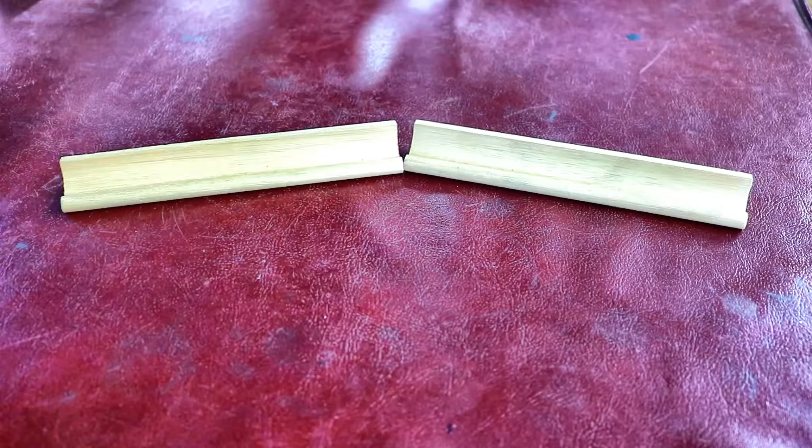This is where we left off on our Fusion engine with the cylinder, of course, operating and the piston operating. Now we're ready for the crankshaft assembly, and we're going to make that as a sub-assembly like we did the piston. Just so we have a little more practice at sub-assembly type thing that is not in the same drawing or the same model. So we'll create a new drawing or a new model.

Click New Design at the top. Let's save it right off the bat. Crankshaft sub-assembly. How's that sound? And then we'll create some components after my computer catches up. There we go. Then we right click on there and say new component.

First component will be the crankshaft. And we're going to create all the components at once here, I mean, at least their headers all at once. Crankshaft, then we'll do the flywheel. Then we'll have the crank web. And one more, we'll have the crank pin. We'll make crankshaft our active component. And of course, S for sketch, create sketch.

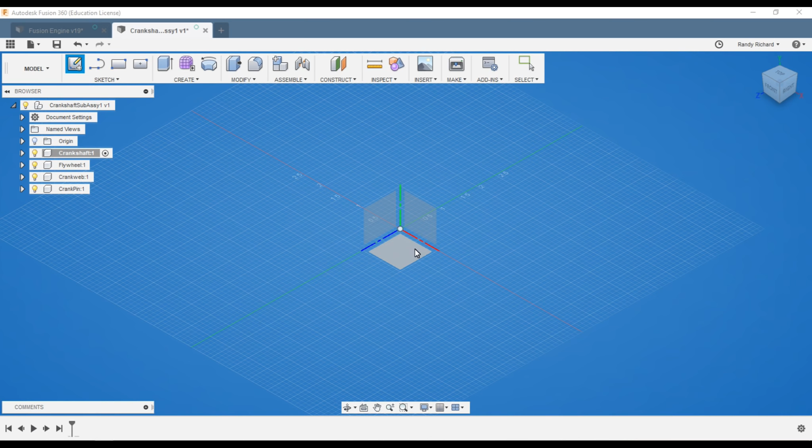Okay. Now this sketch I'm not going to do a profile on. It's very simple. It's just a 1/4 inch rod with a flat and a straight knurl on one end. And so I want the Z axis here to be my axis down the center of the crankshaft. So I'm going to click on the XY plane. C for circle, right in the middle, 0.25. Stop sketch. Q for press pull, and it's 2.5 inches long. That's our crankshaft.

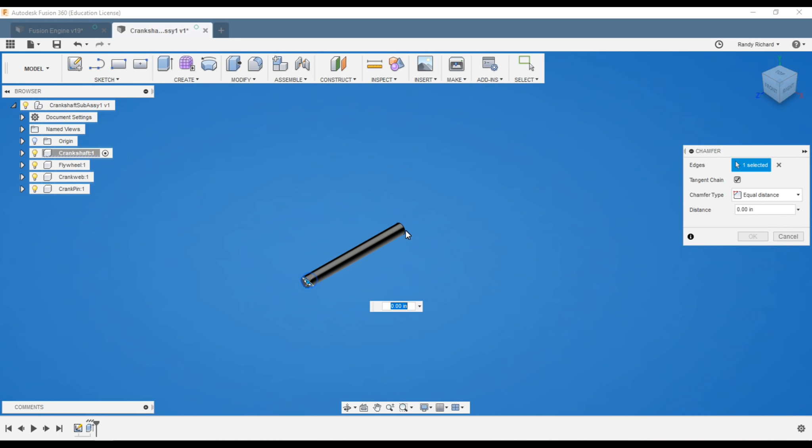Now we need a flat on this far end, and we want to show a chamfer on here. So we're going to chamfer it first. And this is going to give you a little bit more insight into project by doing this first. 20 thousandths. Yeah, that's a nice little chamfer, see? So both ends are chamfered. We'll go to the far end down here on the right. We'll just create sketch, and we'll select the very end.

Now, I just want to create a flat that's cut away from the top of the shaft for a 1/2 inch deep. And if I do a line and just draw it across here, my plane is the small diameter, not the large diameter. So I can see how it snaps to the diameter of the small part of it, which is kind of nice, and I could just snap there and draw a line across, right? I'm going to delete that. But really what I want is a line across the large diameter. But if I do line, I can't snap to it because it's not on the same plane.

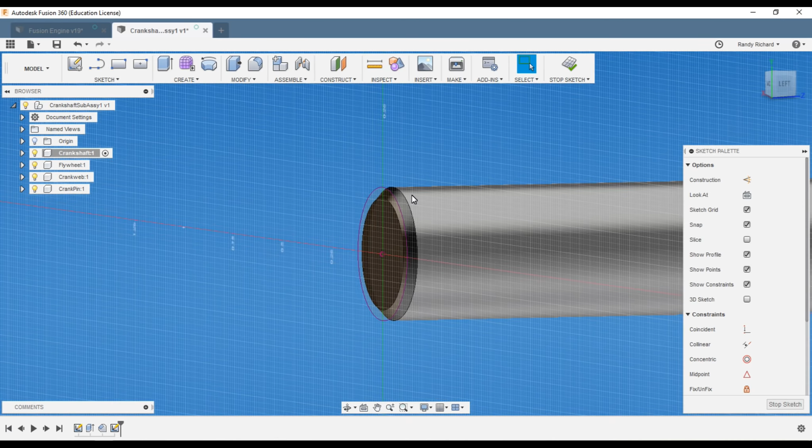So this is where project comes in handy. If you do P for project, select that outer diameter and say okay. Now I'm going to turn the work, and you'll see what it did. It projected that circle showing the outer diameter onto the plane that we're working on right there. See that circle? And basically that's what project is. Project is projecting something to the plane you want to work on. It projects the profile of something onto that workspace so you can use it.

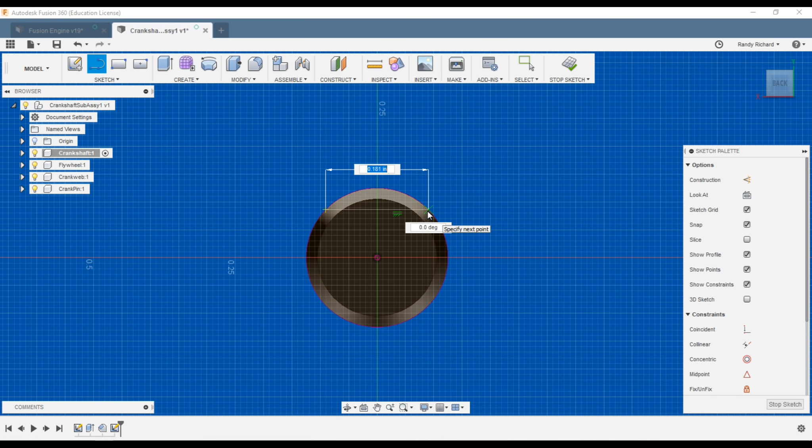Now when I do line, I can snap to it. See how it snaps to it now? And I can just go straight across and snap to the other side and say escape. And I'll set a dimension from the center up here, 0.1. Gives us plenty of room for a flat. And now it turned green, and with the blue background, green means it's constrained.

We'll do a line up, over, and then down. There. And we'll put a distance on that so we can fully constrain it. We don't care what it is. And now we have a nice little box that we'll use for cutting. Stop sketch.

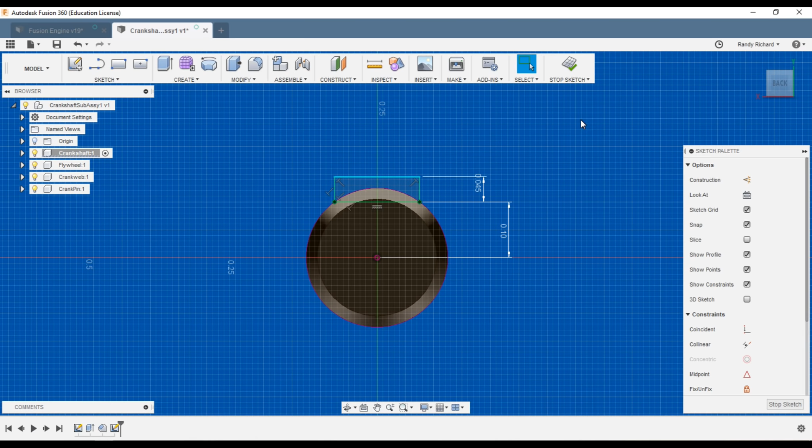And we'll press pull that again, and we'll select all three of those little bits, and we'll just go down here at 0.5. Oops. Edit feature, minus 0.5. Oops. What else did I do wrong? I had join and not cut. There. Gotta make sure I click all the boxes. And now we have a nice cutaway where the flat goes. I just wanted to do it that way to show you the project feature.

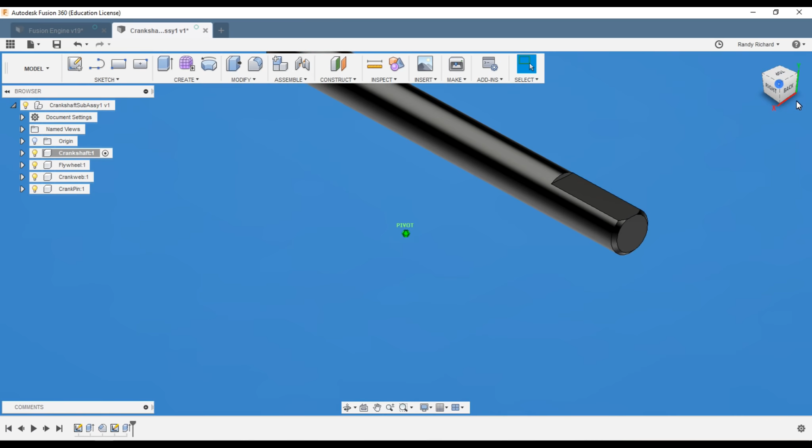The other end has a straight knurl. Now, knurling is not a feature within Fusion. If you want it to be an actual feature where you might machine it with CAM, you'll have to actually model it. If you want it just for looks, it uses up a lot of calculation and a lot of resources for your computer. But this is a very small piece and small knurl, and it's within this one model. So I'm going to draw a straight knurl for you, and it won't eat up too much resources on us.

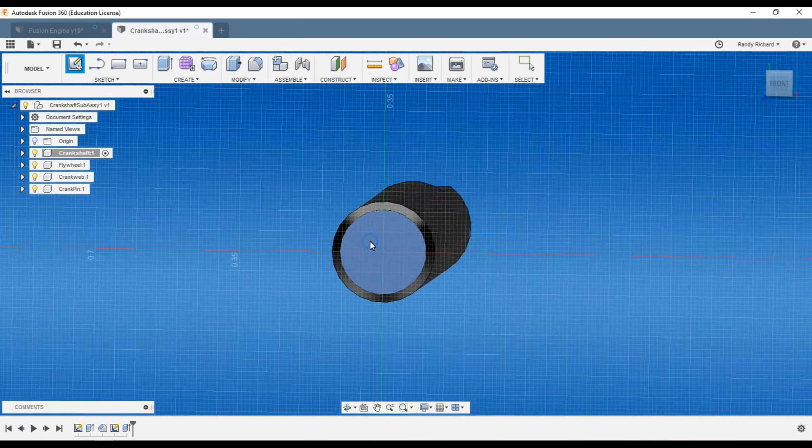And it won't take very long to do. So we'll do sketch again, create sketch. We'll use the end of this plane. And we'll do the project again. Project. We're going to project that outer diameter. Say OK.

And we're going to zoom right in here. We're going to sketch the form with a polygon of our knurl. Now a knurl is just going to be a V groove in all essence, right? So you kind of snap on that line if you want. Polygon, make it 3, and then we're going to make this point 0, 0.

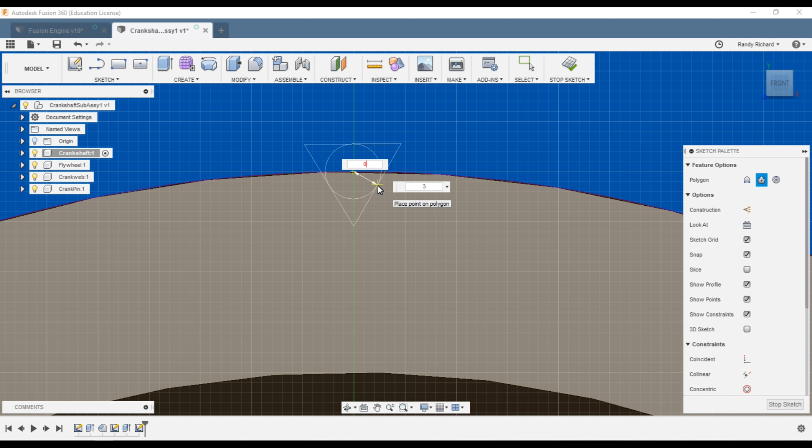Let's make it 4. So 2 thousandths, I should say. 0.002. See, and that's a radius of the inscribed circle. So this is about four. Well, it should be about 4 thousandths across. Since this is just for an aesthetics thing, reminding you need to knurl this, that'll be fine.

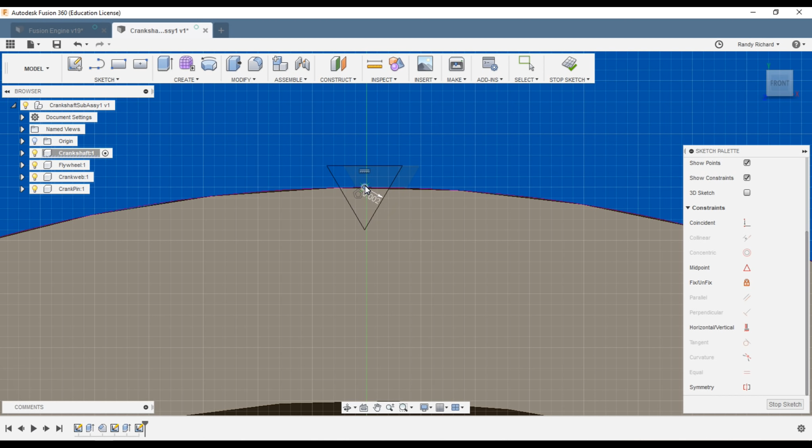And then we'll take the horizontal vertical constraint and click on that. And what it did is made that horizontal vertical, moved it. But if we grab this now, it will stay locked on the outer diameter. And we should be able to drag that over and roughly snap it in right there. It's fine.

We'll use the coincident. It's already constrained. Let's see what else. To get that to be constrained fully, probably have to put a line in. Make it a construction line, and say that is coincident with that, and that will fully constrain our drawing.

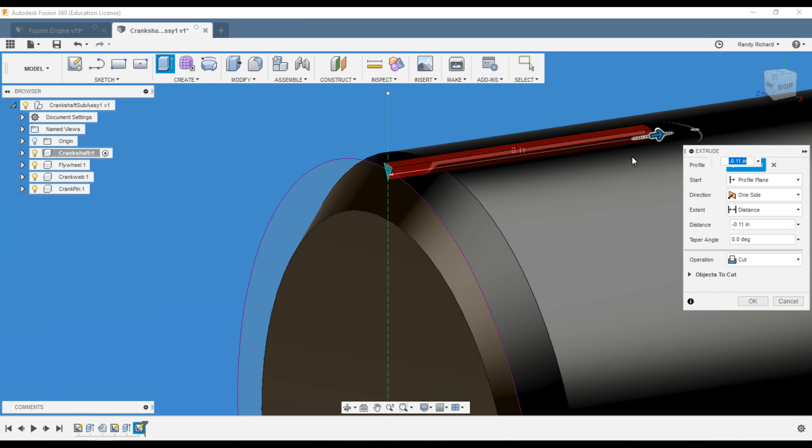Stop sketch. We'll do a press pull. Select little triangle, and it goes in for 0.11, minus 0.11, minus 0.11. Okay, it's a cut, and you have this little V groove. Okay.

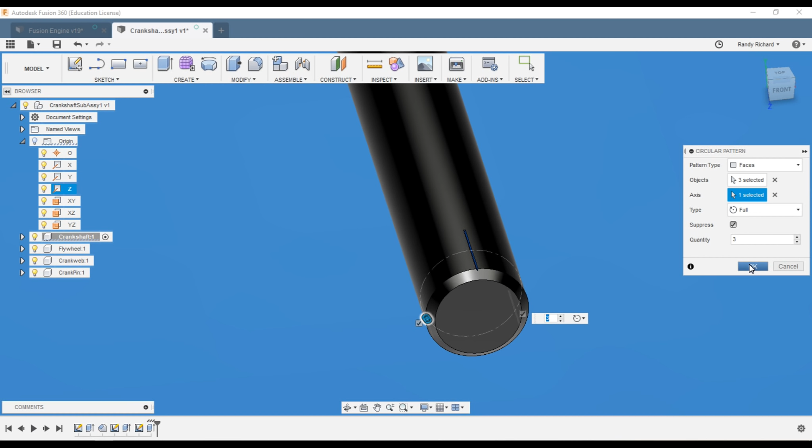Now we'll do under create, we'll do a pattern, a circular pattern. We're going to select faces, and we're going to select all three of these little faces in here. Okay. Axis, we know is the Z axis, so we can go over here and just say Z and say 3. No, try 100. See how long it took to calculate that? Now you can zoom right in here. You can see how it has a little bit of a flat on it.

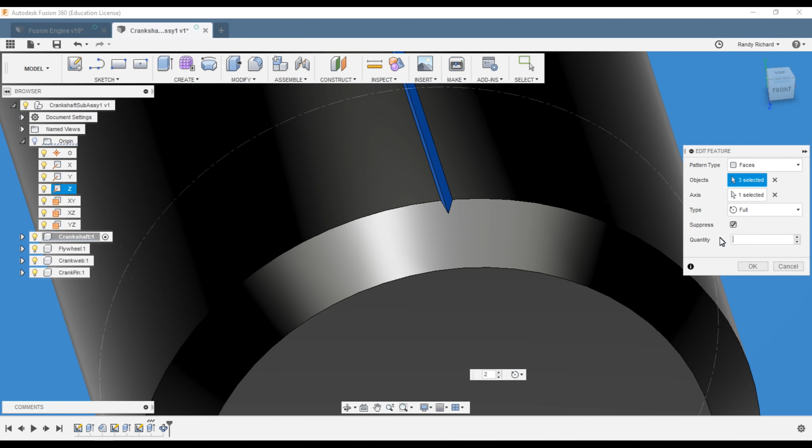Now if you wanted to edit that feature, you can go down and click on it in your history line and say edit. And let's make it 120. It all matters how much of what kind of form you want, if you want it to be real sharp or a little bit flat. I'll leave it a little bit flat, but that's how you could edit it. Now we have a nice little straight knurl.

Now making a diamond point knurl is very similar, but it's a little bit more complicated, and you're going to use a coil and all that. I'd have to make a separate video to show you how to model that.

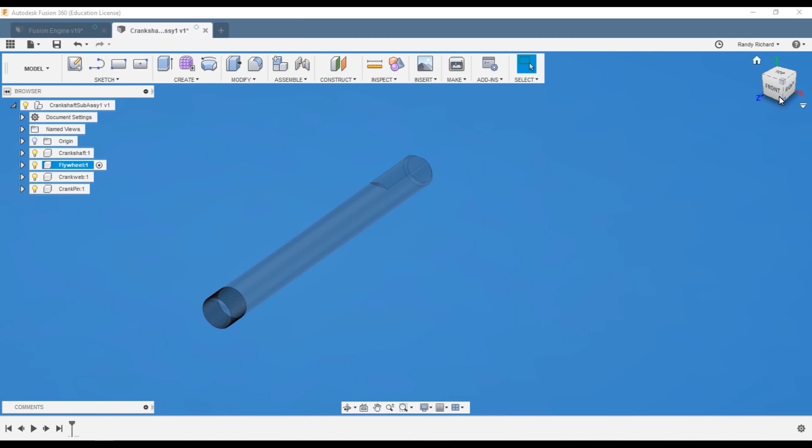All right, crankshaft's done. Let's go to Flywheel, make it active component, and we're going to do the profile method of making the flywheel, and it will take us I think 3 sketches to make the flywheel. And I did draw this in a couple other methods, and I still end up with the fastest method is 3 sketches, no matter what I did. So the profile is probably really the easiest.

So we'll do sketch, create sketch, and we'll sketch it on the Z-axis. So we select that plane. And we'll draw a center line for our length, and that's 1 inch. So we have a referencing line, and let's see here. The hub is offset mostly to the end here, so it's 0.7 divided by 2.

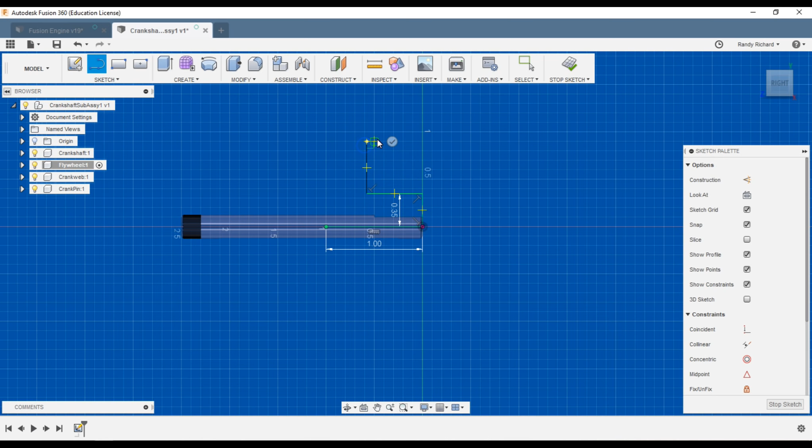Line. It comes in. Now we're just going to sketch kind of roughly what the flywheel looks like. There, goes up, it comes over, it goes up, goes over to here, and down, in, down, over, and down. So there's our rough shape of the flywheel, and there's a bore, and so we have a line in here like that.

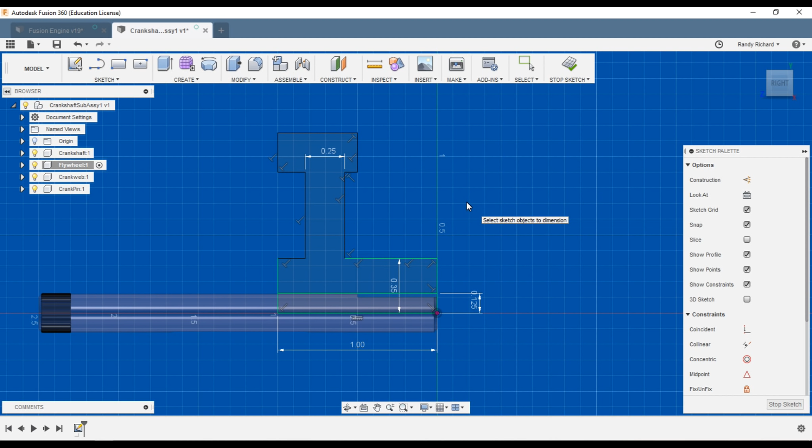Well, our bore diameter is a 1/4 inch. We know that 0.125, then half of that. The web width. Let's make this a 1/4 inch. That's plenty thick enough web. Let's see here. This dimension is 0.625.

And what we want, though, is we want the center of that line to be on the center of this, and this to be collinear with that. So let's use some of our constraints here, collinear, and say this one needs to be collinear with that. And these are all building as constrained parts, so that's good. So that's constrained and that's constrained.

And now we want this to be in the middle of that. So let's put a line at the midpoint. Just do that, make a construction line, and then we're going to say this is symmetrical about that line. Oops. Back up here. Do that again. This one, and then... Always select your 2 lines first and then the one you want it to be symmetrical about.

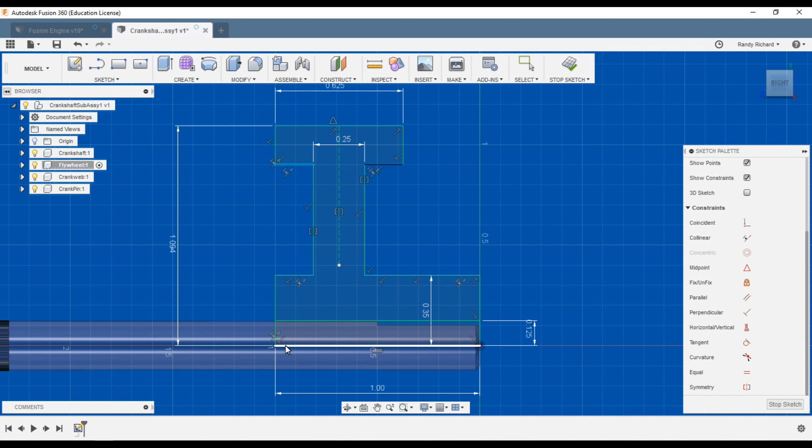Let's see here. These lines we want to be collinear. This one I want to be collinear with that. And we need some dimensions. So the overall outside diameter, oops, it is 2.187 divided by 2. And this here works out pretty nice looking flywheel at 1.5 divided by 2. There you go. And it's fully constrained, it looks like. Yep.

And we could say stop sketch. We'll do a revolve of only that portion. Okay. Select the axis right there. New body, say OK. And we have our flywheel. Now our flywheel has a set screw on the top here. So we'll put that hole in now.

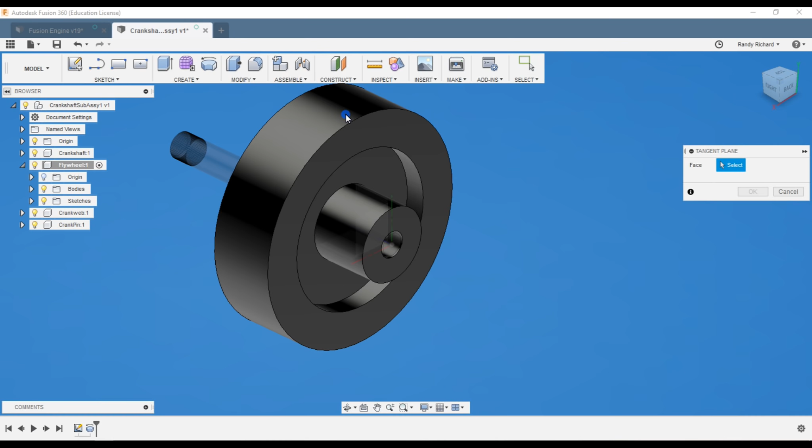And the easiest method I've found is using a tangent plane. And it's going to make it plane tangent to the face. So select the face you want it on. There it is. And see how it's nice and just rolls around the face. Then you want to select a reference plane. And we'll turn on the origin for the flywheel so we can see it real well. And not that one, this one right here.

Now either one of those would have worked, but this one, it will be 0 degrees and it will be on top and parallel with our little flat. Then you go back to sketch and create sketch and select that new plane you drew. Now for this one, we're going to do this a little different. We're going to put a point in. And we're going to do right on the axis, just snap somewhere on the axis, and that looks like a good spot. No particular dimension, just whatever is okay with you.

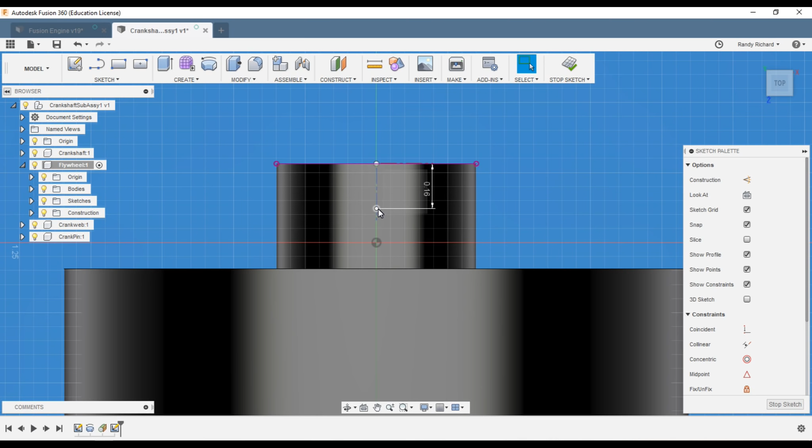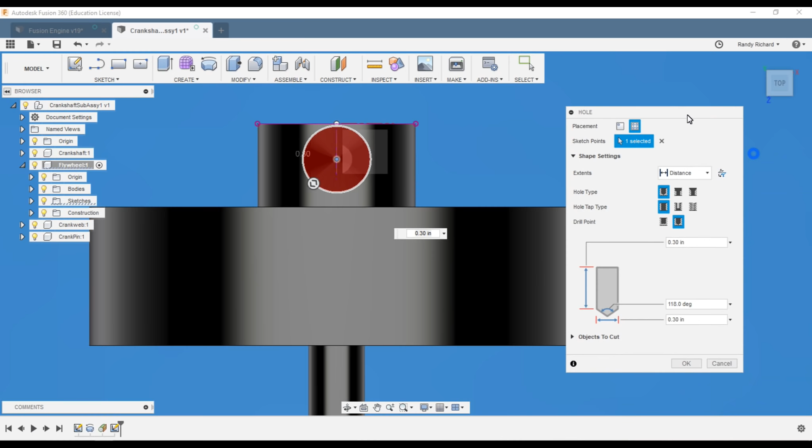So let's say make it 0.160. That looks pretty good. It's about halfway. It's really incidental. We know it's going to be on the shaft, and it should work out. Stop sketch. Now I'm going to do a hole command, and I'm going to select the point. Now that hole's a little on the big side. This is a 10-32, and it's going to be a threaded hole, flat, and we'll go down here. Let's select the number 10-32.

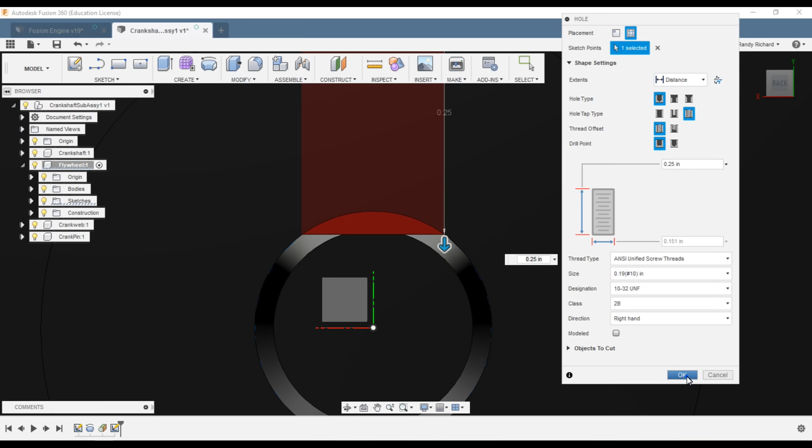So we know, see, we can get a relative size. Now, if you wanted to move it in or out, you could easily do that. And then over here, we don't want to cut too far. We don't want to cut into the shaft. So we're going to look at this, what we're doing. And we can just drag this up there to match where the flat is. Pretty much. And get your box up and say OK. Now you have a threaded hole, 10-32, already in there.

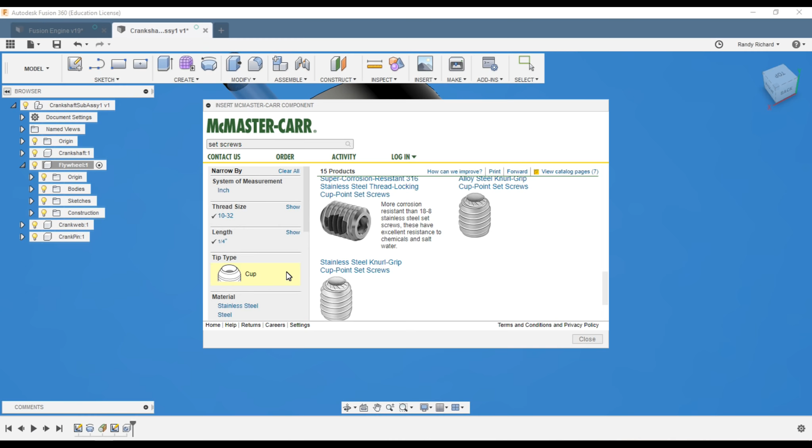And we can put a set screw. We'll do the insert command, insert. Oops, back up here. Set screws, there we go. 10-32. Cup point, fine. 1/4 inch length is what we want. Let's see here. There we go. Product detail. Everybody should know how to do this by now. Step file. Save.

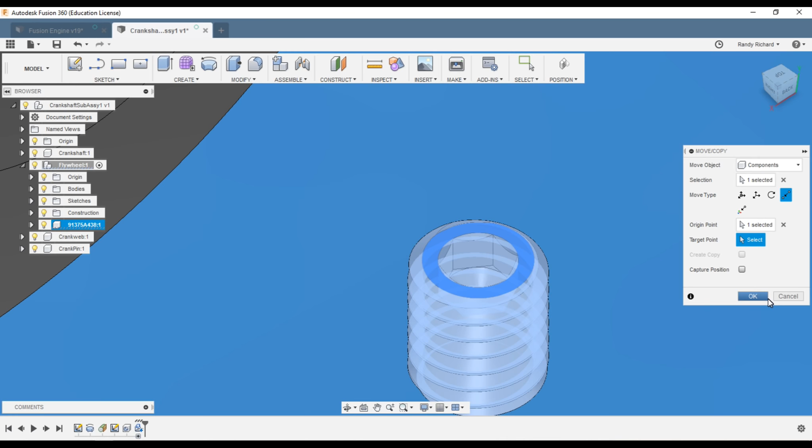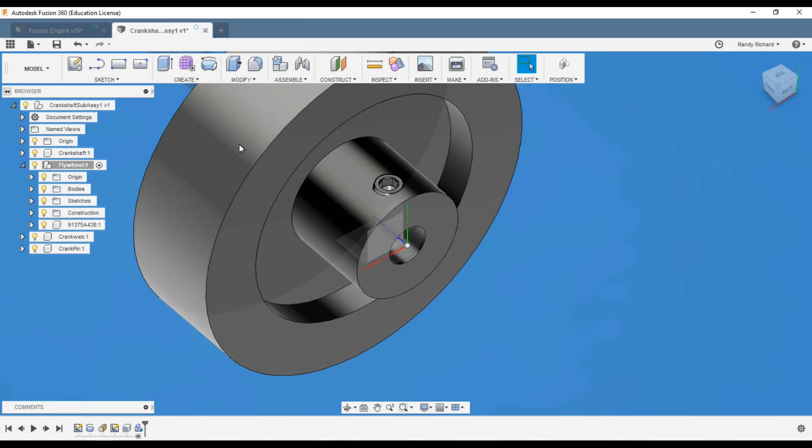I'm just going to orient it a little bit better. There we go. I'll do a point to point, and we'll select something that's going to give us the center. This is a little bit difficult because you're going to get radiuses and stuff. There, hold down control, select the center one right there, target. Now since we did not model that hole, the center is a much easier thing to pick up, and say okay. I'm going to do all my joints at the end and lock everything together at the end.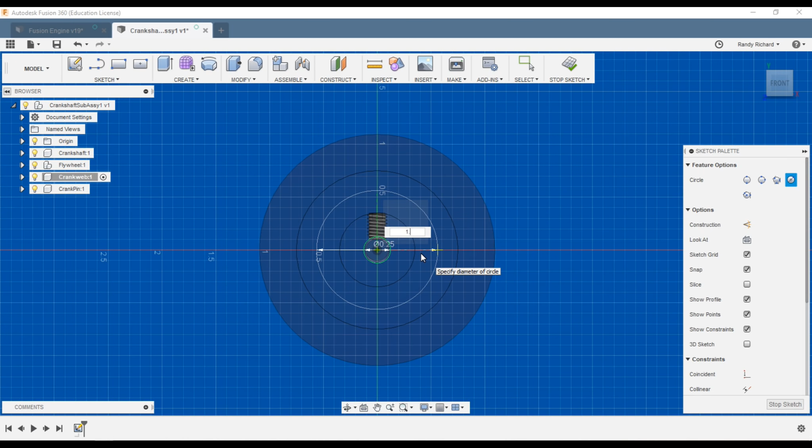Flywheel's done. Let's go to crank web. Crank web sits right here on the end. So we'll just go sketch, create sketch. Select the end here. Capture position on those other ones. C for circle, 1/4 inch, right, for the bore. C for circle, and it's 1.125. 1.375. And there's a C for circle for the crank pin. And we just go down the center line, and that is 0.187.

And we need to dimension that. Now, the dimension here is something to remember because this is 0.562, but that's the dimension that sets the stroke of the piston. So if you felt compelled to change that stroke length, this is the dimension you might want to change. Let's see here. So we're still not constrained, are we? So if you put a construction line in and just say that this is coincident to the line, it will constrain that. That keeps it on center line, right?

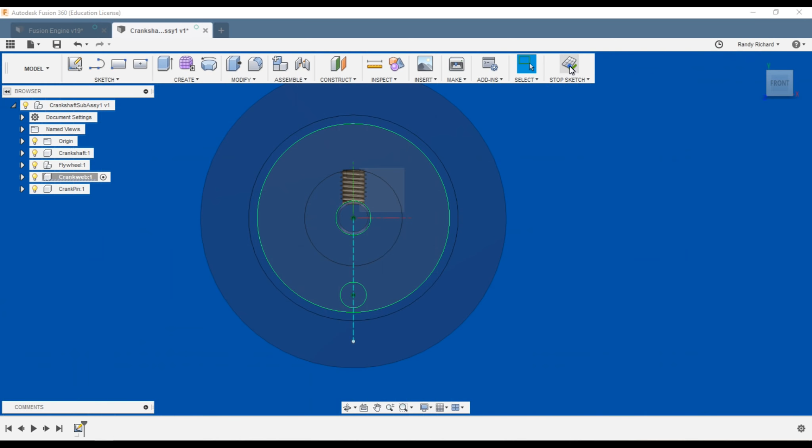Stop sketch, press pull, select just the disc you want. Those others are holes. New body, and it's going to be a minus 0.25. Now what happens here is this is just pressed onto that knurl. There's no set screw in this. We're done with that. Crank pin.

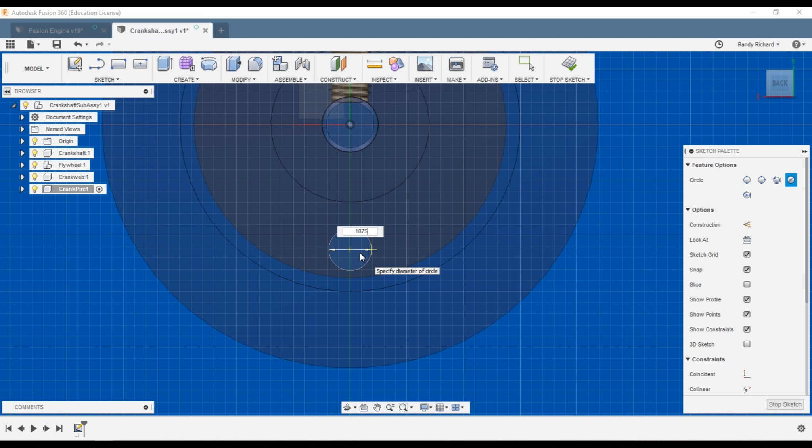I'm going to draw it from over here on the back side. So sketch. I lost my little icon. There we go. Put it back. Create sketch. And select the back side of that. I'm going to say C for circle, 0.1875. It's actually going to be a 3/16 rod. Stop sketch, press pull, select that, and it's 0.75 in length. Whoops. I keep doing that, huh? Edit feature, minus. Okay.

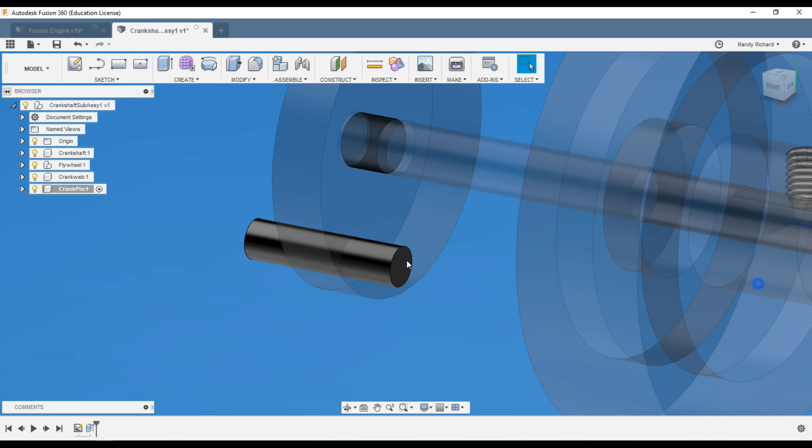Now on this one, this is basically the same as the crankshaft, and you'd want to chamfer each end of this, to make it easier to slip your con rod on and to press it in here. Now this also has a straight knurl on it. We can just hide some of that stuff.

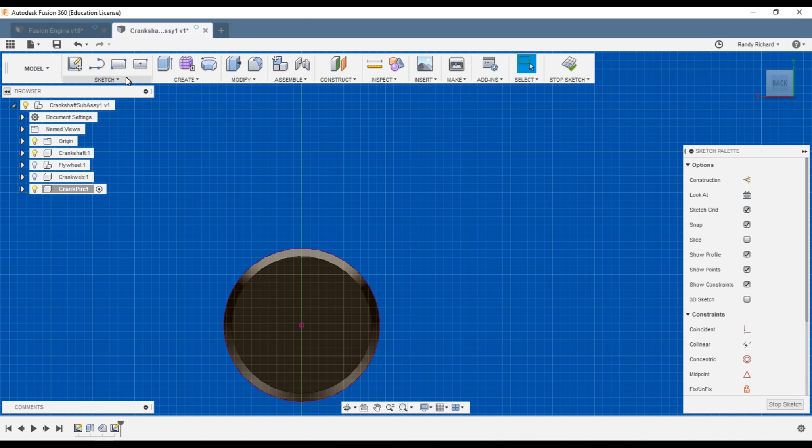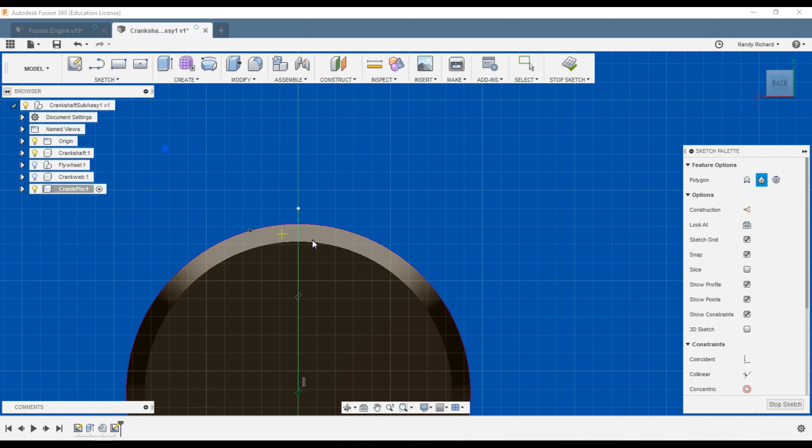Sketch, create sketch on this end. P for project. Select that outer one. Okay. Align. Or no, a polygon. Let's get that right. And we'll just come up here like we did before. Straighten it out. Put a line in. And just drag it over here. I lost it. There. Do this again.

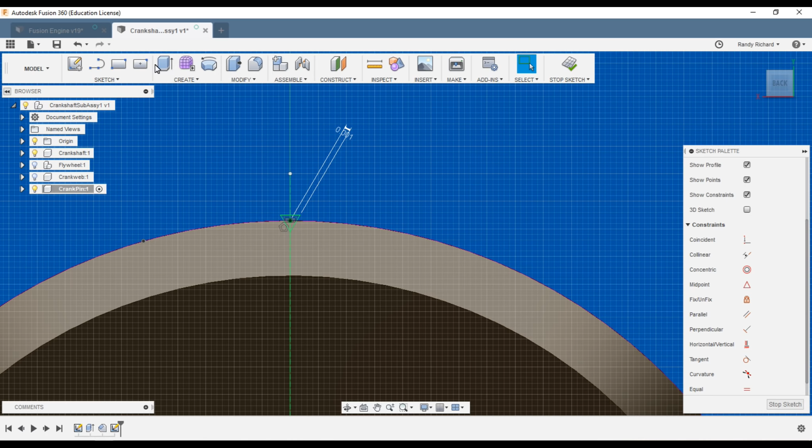That's it. We're going to make this 0.001. I didn't put that in initially. Press pull, same. Cut. Minus 0.2. Okay.

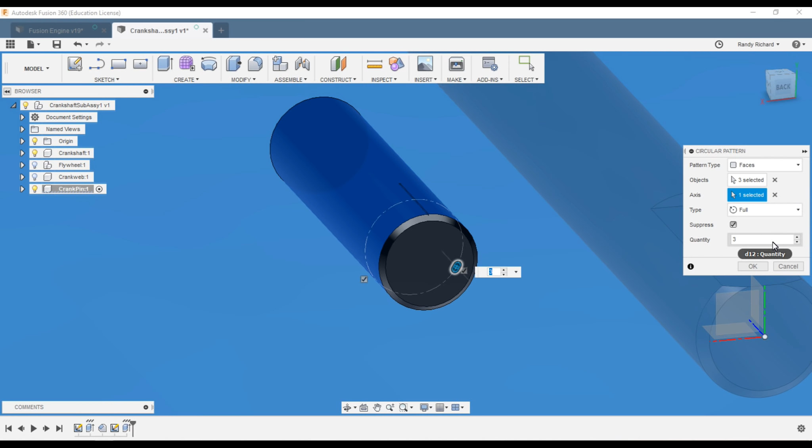Create pattern, circular pattern. Axis. There's no axis, but select the outer surface of the pin and that acts as an axis. I think 120 is probably pretty close, good enough for us here. And that looks pretty good. You can then turn on all your other objects and select the base object, and we have a crankshaft assembly.

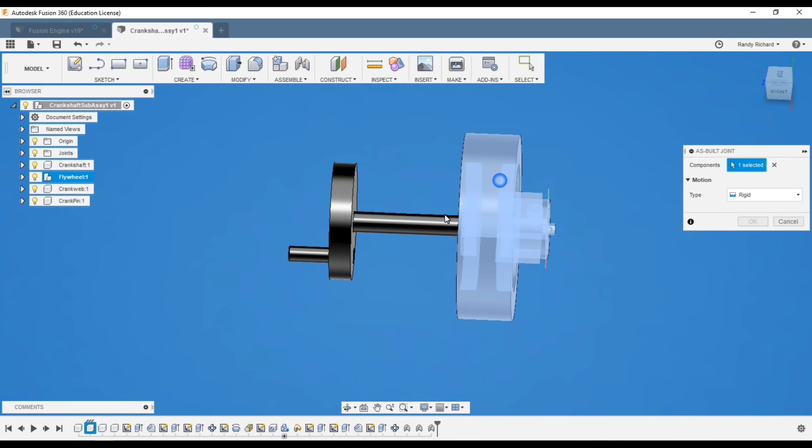And we turn off our origin, we turn off our joints, making sure our origin and joints are all turned off. If you don't turn those off, they will show up when you move this or have it appear with your main model. Those joints will be there, and then you have to come back and turn them off. So do all this ahead of time before you bring it over to your model.

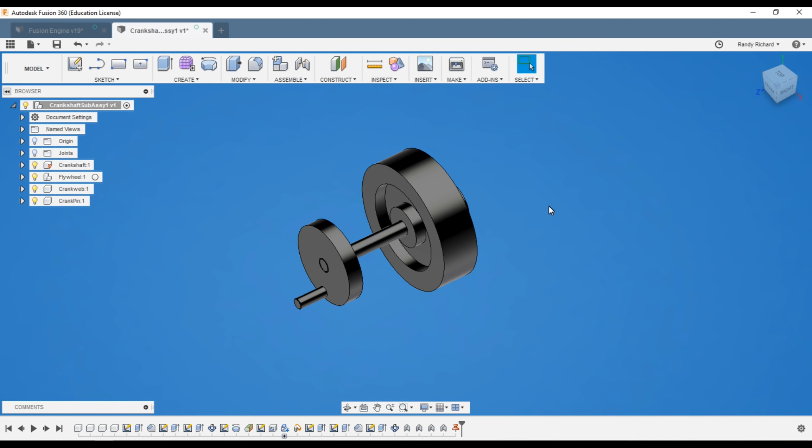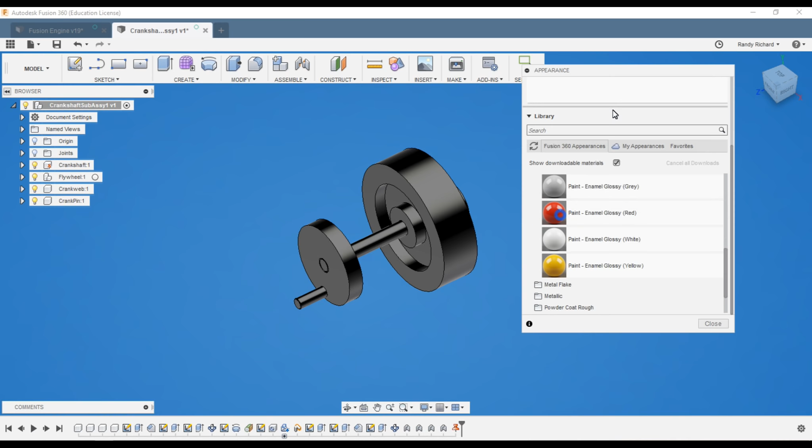So if you're going to do any appearance stuff, we could say A for appearance. Where was it? We did our paint. Glossy paint. We used blue, and we used red. Our color schemes. So let's make the whole flywheel blue, and we'll choose faces, and we'll make that face red, and make that face red. And the other ones are already steel. Those are my default.

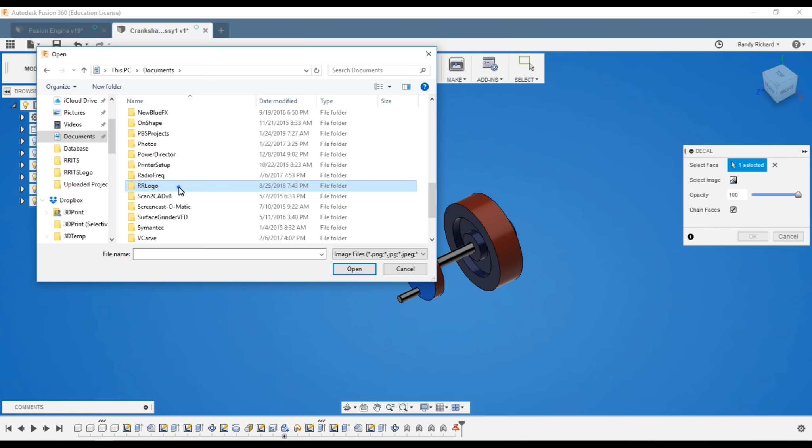And we'll put our decal on this face right there. I just have to, there we go. Turn over here and give it a little better positioning. Yeah, somewhere in there. If you zoom in, you'll have a little finer detail in that movement. Say okay.

All right. Now we didn't do any saves along the way, so we're just going to save, and we'll just say final on that. And we're good. And we'll give that a few seconds here to save. Now I have a bunch of versions going because I've drawn this several times. Well, okay, so that's a basic flywheel.

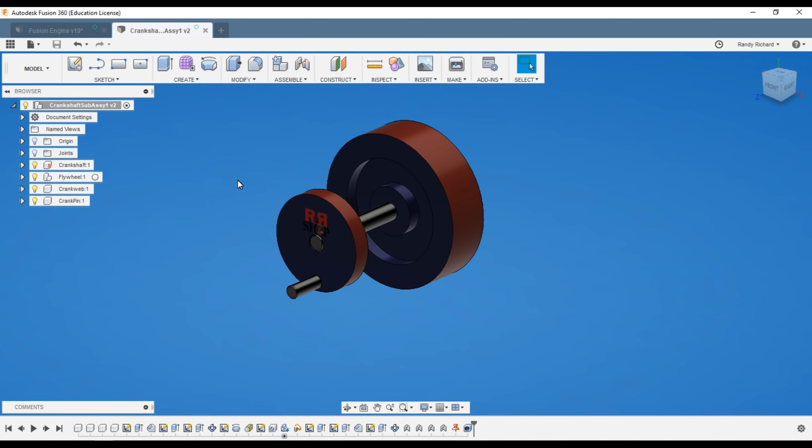One thing we forgot here, we'll go back to flywheel, and we did not put any spokes in the web part of the flywheel. So we can do that. We'll just say sketch, create sketch here. I selected the flywheel as the active object. Select the center. I'm going to put a line up here, construction line. I'm going to do another line, just a vertical line anywhere in here. We'll dimension that line and make it 0.125.

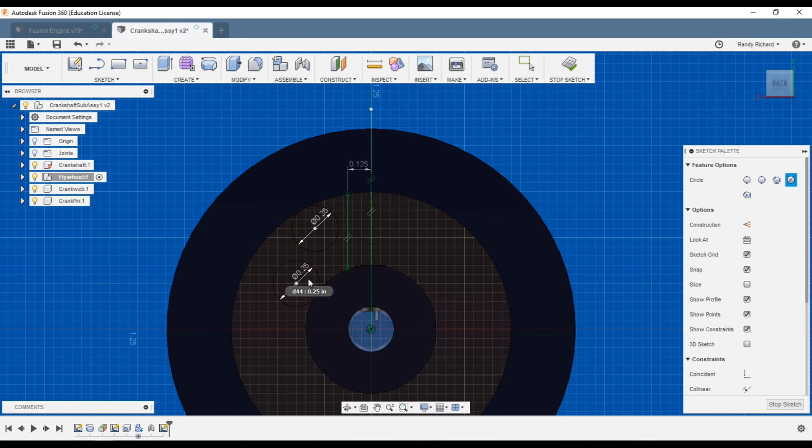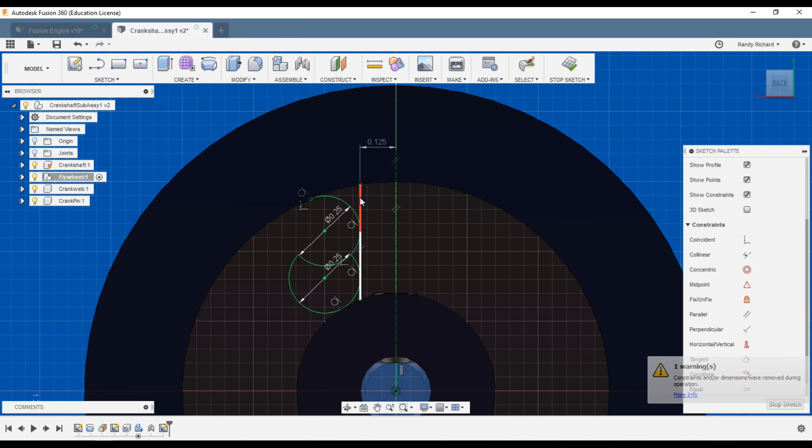C for circle, we're going to put some 1/4 inch radiuses in, 0.25. C for circle, just drawing those anywhere. Then we'll use our constraints, tangent constraint, tangent to this line, that circle, this circle tangent to this circle. This one tangent to the circle, and then tangent to the line. And if you trim off some of this, trim that, trim that, trim that. Now we have a 3-segment line here.

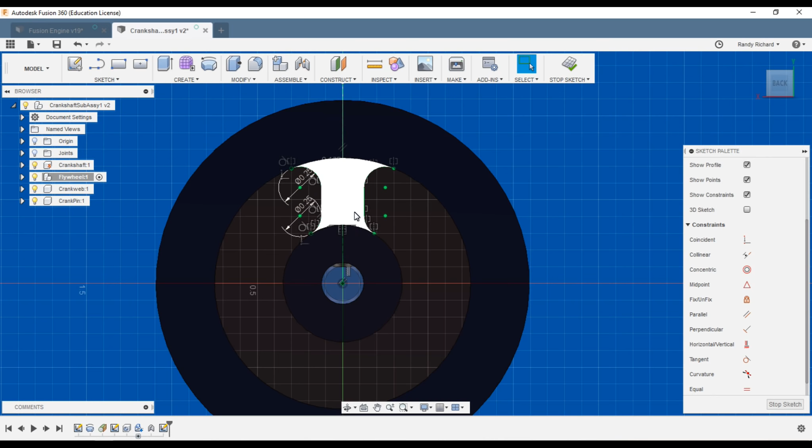Say escape, and we can then sketch mirror those 3 segments, and we'll select our construction line as our mirror line. Now we have the same over here. Okay, that looks pretty good. Now you can do this part 2 ways. You can circular pattern those lines all the way around, or you could make this a cutout, make this a spoke, and then make a circular pattern for the object.

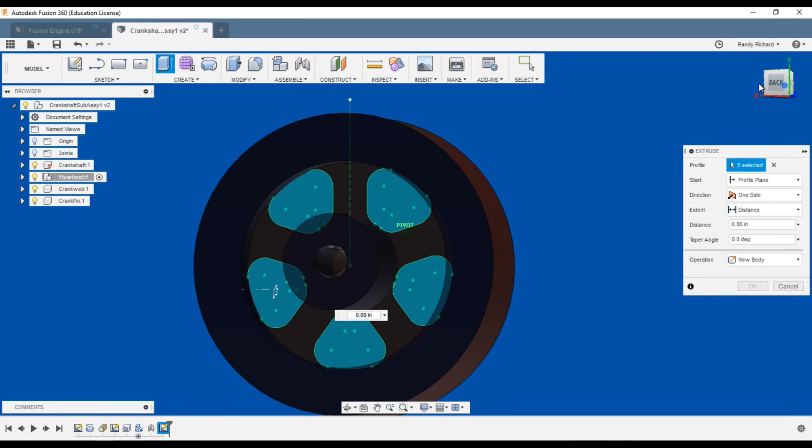So we'll just do the circular pattern right now. Circular pattern, and we're going to select all 6 lines like that. Select the center point there, and we have 3. Let's make it 5. Say OK. So we'll have 5 spokes. And we'll stop sketch. Then we'll do a press pull, select all 5 of those, and come around to this other side. Say cut. OK. Now we cut in our 5 spokes. Now it's done. So when we save it, we could say added spokes.

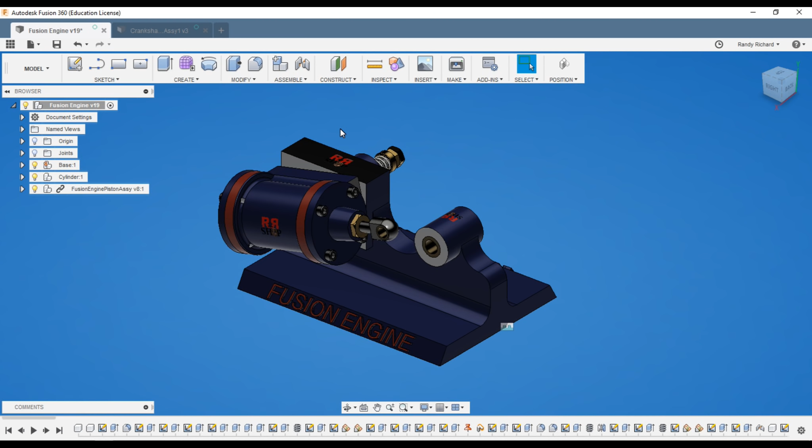And then we saved it. Oh, we should go back to our final assembly, I guess. We'll say save again. Now back over to the Fusion engine itself, our base drawing, and we will find your crankshaft right there. This is mine, and we'll just drag it in.

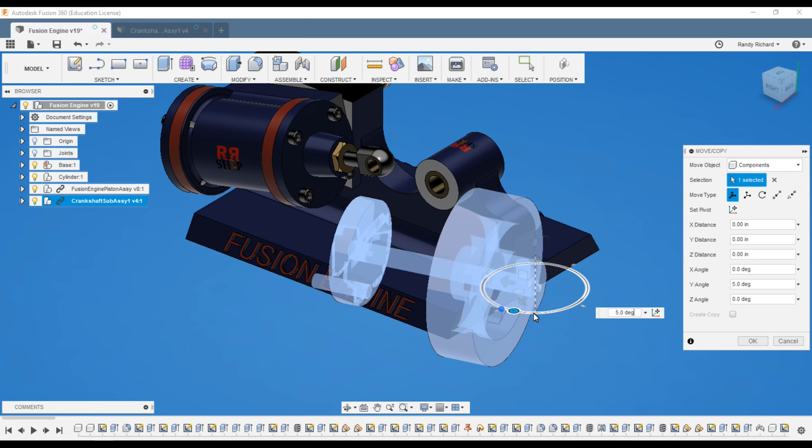And there's the crankshaft. We can rotate it around how it ought to be, probably. It's just a spatial orientation thing. You don't have to do this sort of thing, but we can just to get an idea of what we're doing. There we go. We can do a point to point, and I am going to select.

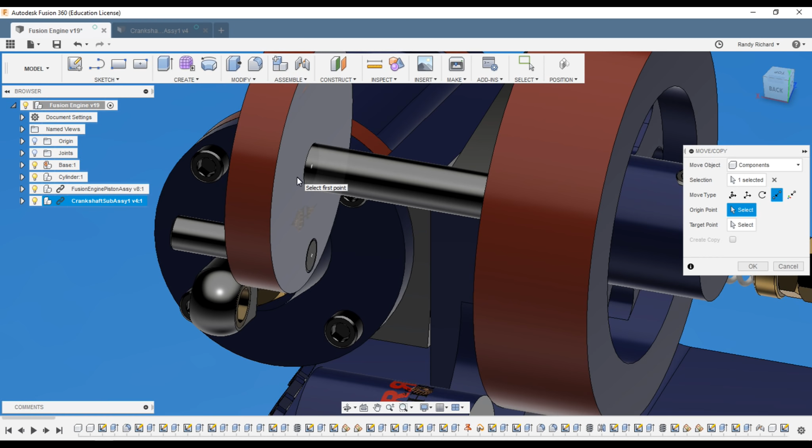Don't select the shaft. All right, your first instinct might be to select that shaft, but if you do, you're going to end up with some point in between here, and it just makes it more difficult. If you select this face of the crank web here, and it gives you the center, hold down Control, make sure you get that point. It gives you some referencing.

And we're going to select the face of the main of the base itself, not the bushing. And we'll say Control, and there you go. Now it's in, and we know that this face is against that face. We can say OK. And now your piston, you can rotate your piston. You can see where the piston rod's going to sit on your crank pin.

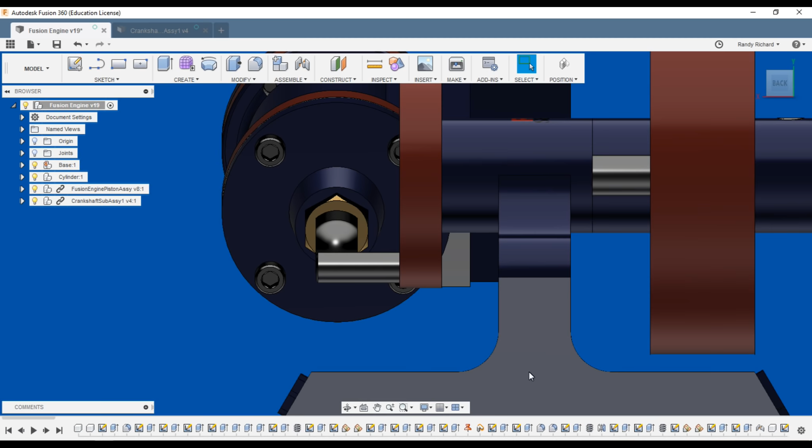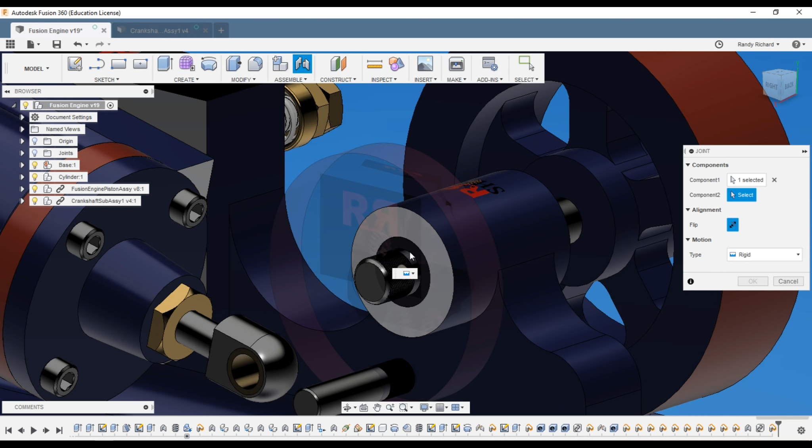Obviously this crankshaft needs to come to the outboard side here a little bit so we can get our piston rod more in the middle of there. So what we'll do is we won't do a move, we'll just create our joint now. Let's say capture position. And we're going to select the same face and select the center again. Then we're going to select this face and select the center again. Of course, that's in the middle, right there, right?

And it's going to be a Revolute joint. There we go, it turns, and we're good. But what we need to do is change our Z offset. Now, if you go back here, you can just grab this arrow and just drag it out, right? And let's see, that's probably close. It's not dragging everything, but we'll say okay and take a look at it and say, oh, that's not too bad. Go back if you want to do it some more.

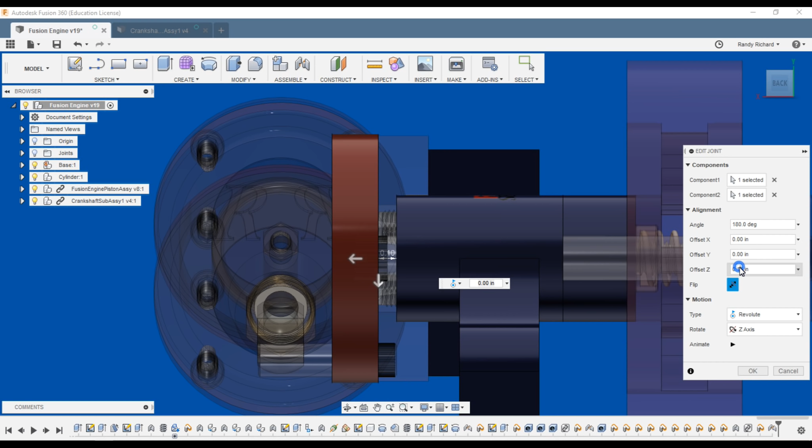Edit joint. That was a tenth. Let's say another 50 thousandths. Let's say okay. Oh, that looks pretty good. See now how it lines up in the middle a little better? And it turns, just like we're supposed to, right? And I can't move it, okay? So that means it's locked in, and all the other parts are locked in.

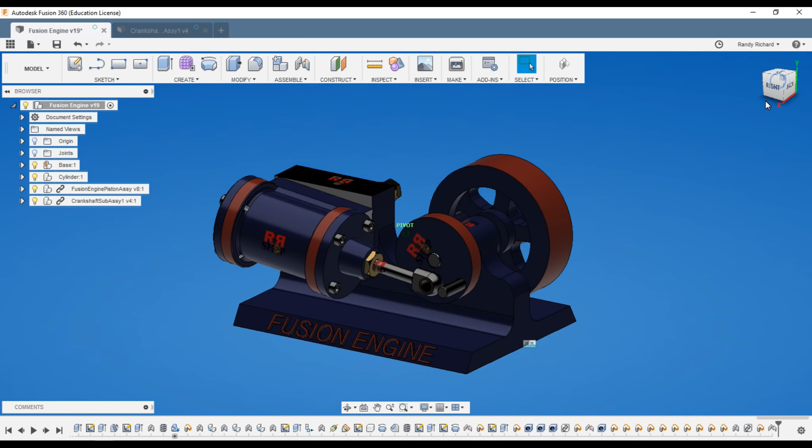All right, now here's the moment of truth, right? How do you connect the crankshaft to the piston rod, so the piston is going to go in and out, the cylinder is going to go up and down. How does that all happen? Well, you'll want to put a Revolute joint on there between the bearing of the piston rod and the crank pin, but usually that does not work.

Yes, the action is a revolution action, but the computer, I don't know, sees it and it doesn't align necessarily right with the joint because you'll have to pick the end, the middle, or the other end, and it's very difficult to try to get this to align axially. So what I do is I'll use a joint, I'll capture position, and I'll use a cylindrical joint, and that gives us axial motion and revolute motion, and it will align properly. So we use the cylindrical joint.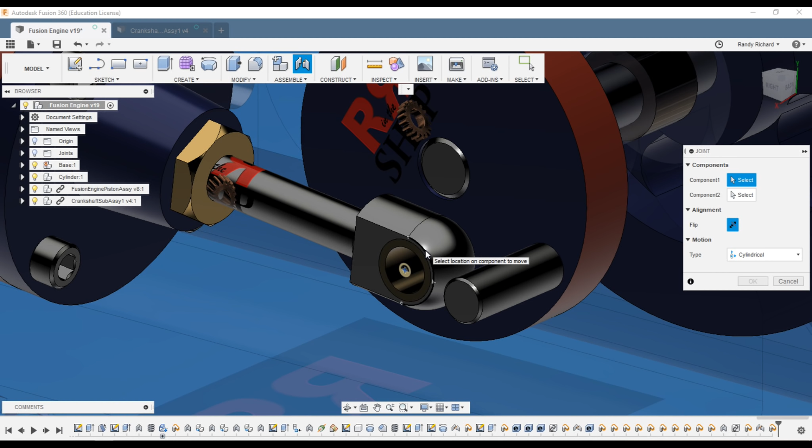We'll select either the face or the bearing and get the center, and just select the end of the pin, the crank pin. And that's going to go right on there, and it's going to fit, right? Say okay.

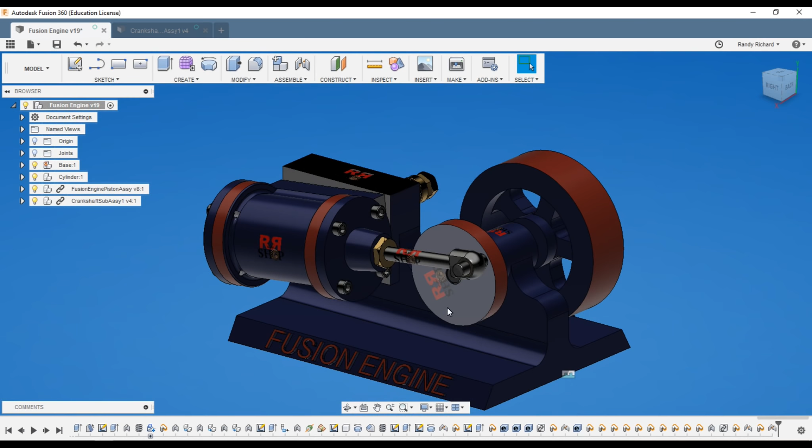Now you had no problems putting that joint in and no errors, and if you grab your flywheel, that should just turn just fine. If I can get it all to turn, right? There we go. You have a working engine.

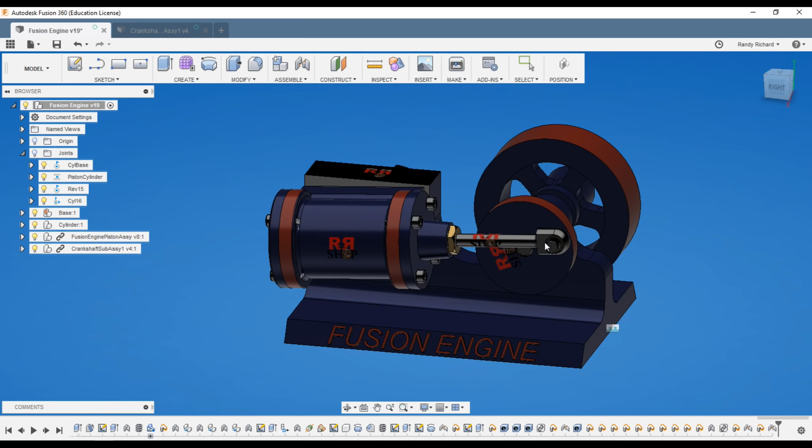Now, if your engine doesn't work, make sure your limits on your joint, the cylinder to base joint, are not too small. Ours are 13 degrees plus and minus, and it's enough. Remember that that is a maximum and minimum angle that we set. It's enough for this to operate, so it's within the 13 degrees. Okay, and that's fine. It's just enough to allow it to operate.

Then you can look at the end here, and this is your maximum stroke right there, and we come around here, get it to turn, this is our minimum stroke. So you're at your minimum stroke. Does the head of your piston rod hit your gland nut? There's enough room here to adjust the gland nut. We have a little gap, and it's enough so we can adjust that and not have the piston hit. So our stroke looks real good.

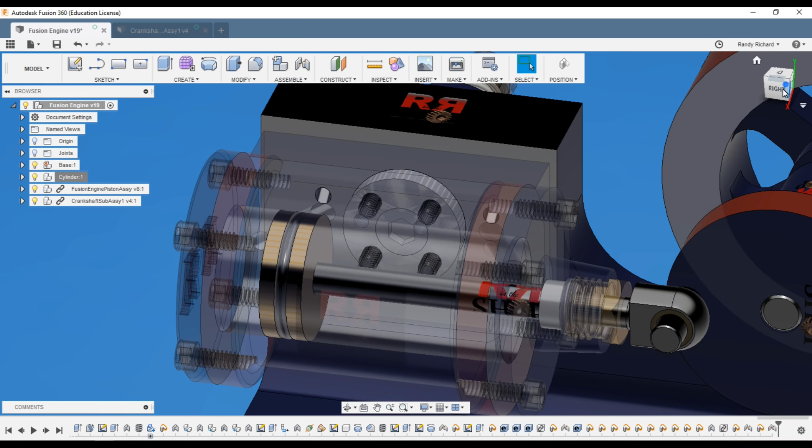You can then select your cylinder and change the opacity down to 30% or so. And you can look inside now, click out, and you can see your ports down in here. That port is on the base, those upper ones, and this angled one is your cylinder port. And as you move it, you can see how your alignment on your ports looks. That looks real good, huh? We're not overshooting them. It looks really good, alignment-wise, on both of them.

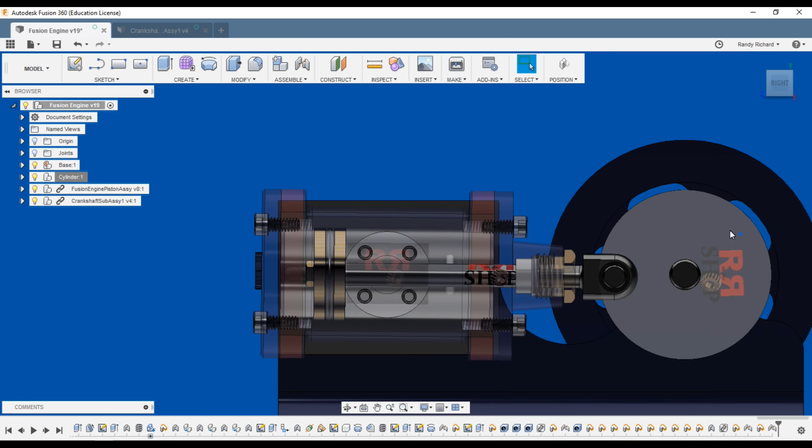You can also check your ports. You can turn it here, and you can check your ports on your piston. Let's see here. I got to grab everything to make it move, but right there is the maximum at this end, and our port is fully uncovered, plenty of room, not going to hit the head or anything like that. And on this end, it's a lot closer, but we still have plenty of room for the cylinder not to hit the end.

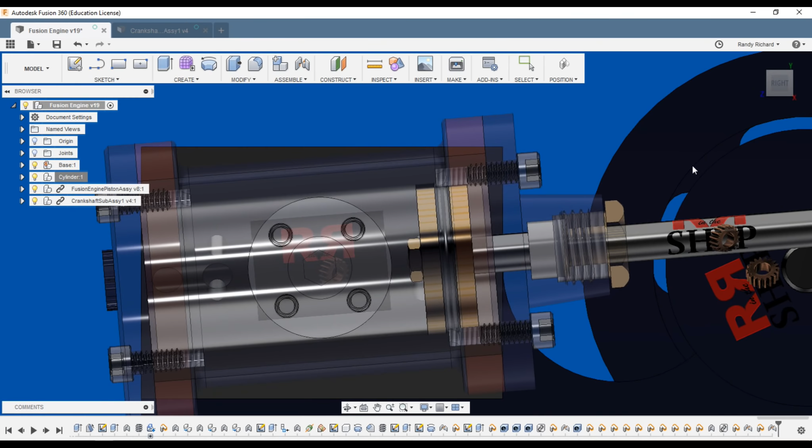Now, the only problem I have with this right here is, where is the port? Okay, right here. Let's look down on it. As this piston comes all the way up, it doesn't have the O-ring go over that port. It just touches a little bit, so it might affect the running, but it really shouldn't. It could. This here could be a little less, so your piston rod could be a little longer.

I wouldn't change the stroke. I would just change the piston rod length so that I have lots of room down at the other end. I can make this piston rod a little bit longer, and then it would not come so close here. So that would be the only adjustment I would do, maybe make this piston rod just a tiny bit longer, maybe 20 thousandths or so, and we'd be just fine. But anyway, this is a running engine.

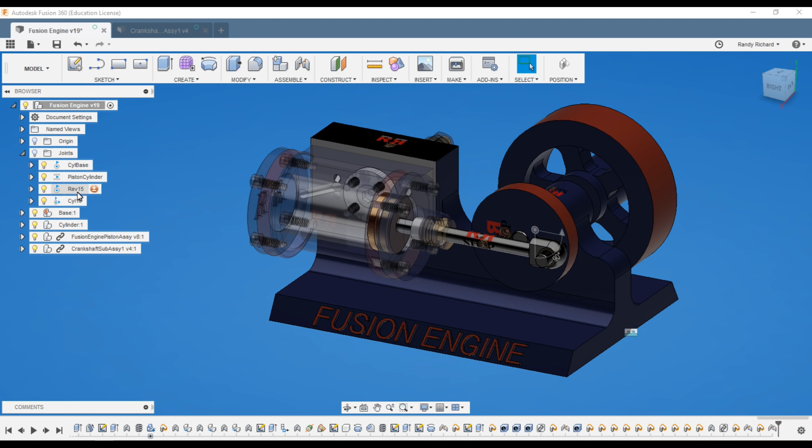Now, if you want to see it run, go up here to joints. This is our cylinder joint right here. We should rename that. There. That's the crankshaft to base joint. If you right click on that, say animate model. Oh no, I'm sorry, that's the wrong one. That's the crank pin, pin to piston. The revolute joint here is the crankshaft to the base. That's the one you want to use. Use that one, animate model, and the engine will sit here and run.

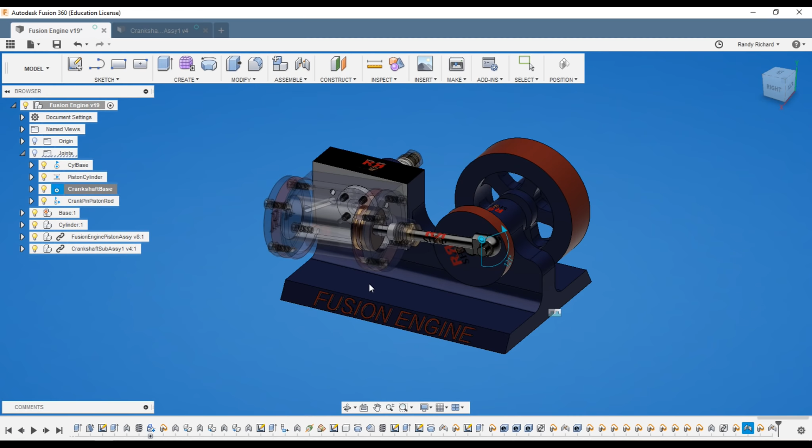And it looks pretty cool. You don't even use any air or any steam or anything. So you can make all sorts of models of all sorts of things by manipulating and working with joints. You can make them do a lot of things. We didn't cover all the joints in this model, but there's more to joints. You could do many videos on joints. But you play with them and you'll be able to figure a lot of it out.

Well, thank you guys, and thanks for watching the series. I know it was long, but it's a lot of stuff to cover. And I hope you have learned how to model some of your basic parts in your shop. That was the goal of this, to teach you Fusion by having a project and having it come to fruition.

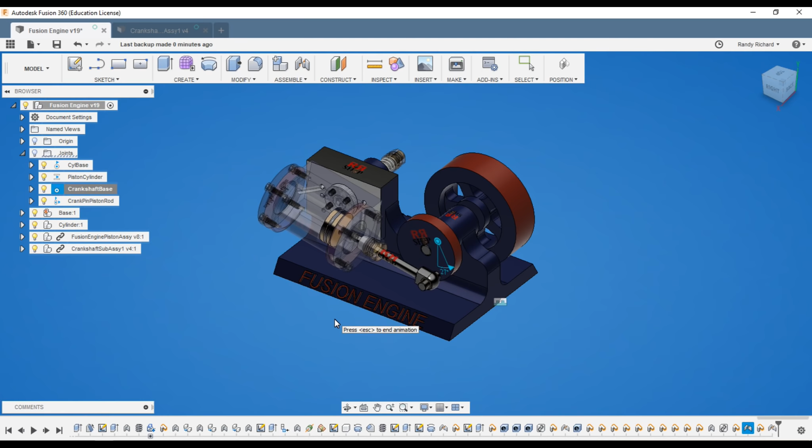I am going to continue on with this, and we'll make some paper drawings. I'm not going to make all the parts. I'm just going to do maybe one video and get you started making paper drawings. We pretty much cover everything you need to know to at least get going on making paper drawings. One question I was asked was about exploded views. It's rather complicated to make a paper drawing of an exploded view, so I'll make a separate video on that.